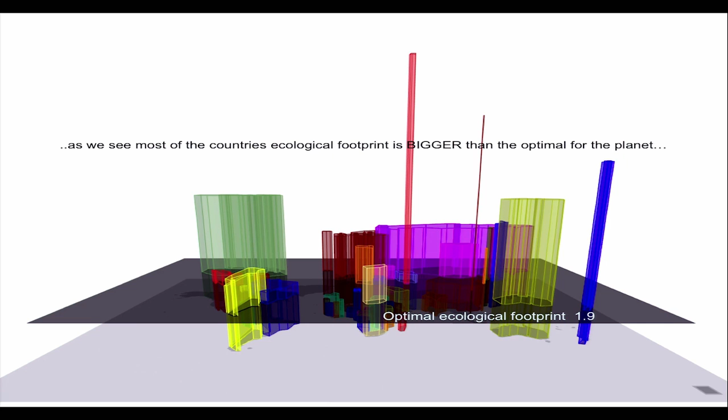That method somehow has become what's there at the moment, measuring through BREEAM, LEED, other kinds of vehicles. Somehow we can measure our activities in that way better. Not that they are good, or not that they are profound, and it needs still development.

So it was advocating, and I think you were also discussing that. What can architecture do in that way? It is almost like a device, a vehicle to measure that and to show not only the state of the art, but hopefully also to measure something like a pre-evaluation of what the future can be.

Because buildings are super slow. Seven years, ten years we need to build them from the beginning of the project. So how much can I make in my life? Six buildings, one could say. But you need already to think about what that building could do and anticipate on that.

So I give you some elements that we did at that moment to notate architecture as a kind of active element. We gave them verbs, like the spanners. They span, and they use at that moment their way of their structure, and sometimes structure can do that.

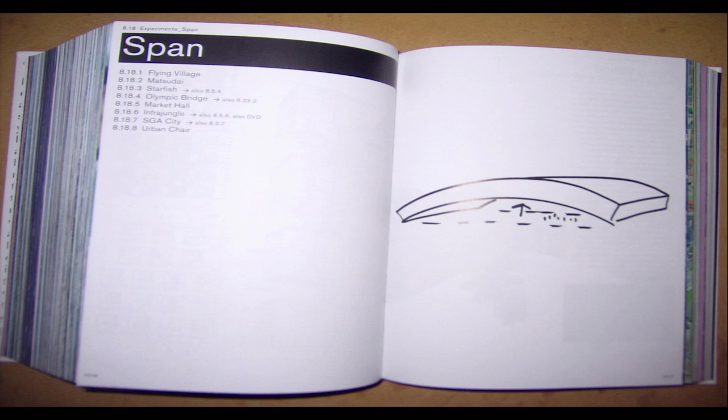Some of your colleagues, who unfortunately died recently, has been exploring so much in the case, I think, in Venice at the moment. So what's next when we notated that?

And I bring you to Rotterdam, because we made this kind of thing, that's 10 years ago, that exactly measures it. And we showed how that could happen. And I'm happy to show what happened last week in that way, because it's a kind of emotional moment for some reasons that I will explain.

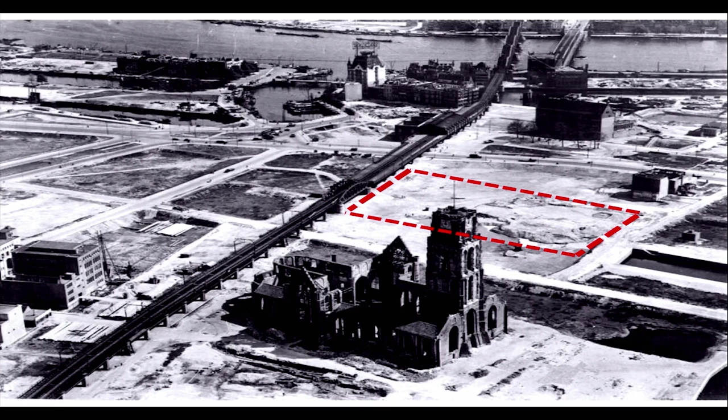So this is Rotterdam, and it used to be like that, and then on that red dot where the dam in the Rotte River has been made, at a certain moment some people threw some stuff on it and flattened out that city. Rotterdam didn't make a decision to restore itself, no. It tried to invent and reinvent itself actually continuously. And that's why I love that city.

I mean, there are buildings from the 50s, rough guys that somehow wanted to compete with Ponti, but didn't, of course, they were not that good. But on the other hand, Maaskant is my favorite Dutch architect in that way. And then afterwards, there came this kind of nostalgia of the 70s. Humanism came everywhere, and we made tree houses where people could live in trees again more. And it ended up in the urban renewal with silly buildings, etc.

So Rotterdam is indeed a kind of incredible mishmash. And maybe therefore even more contemporary than the American cities in a way, because it continues with this reinvention, where the Americans sometimes seem to stop in its own eternity.

So on this place, on the greatest plaza, the biggest, sorry, in Rotterdam, a plaza 1.6 kilometers long and 100 meters wide, so you can really land with a plane in our city. At that moment, we tried to make a kind of scale jump and to say, can we build buildings on that spot to make that plaza somehow in a kind of relationship with Siena, as we said, and how to do that.

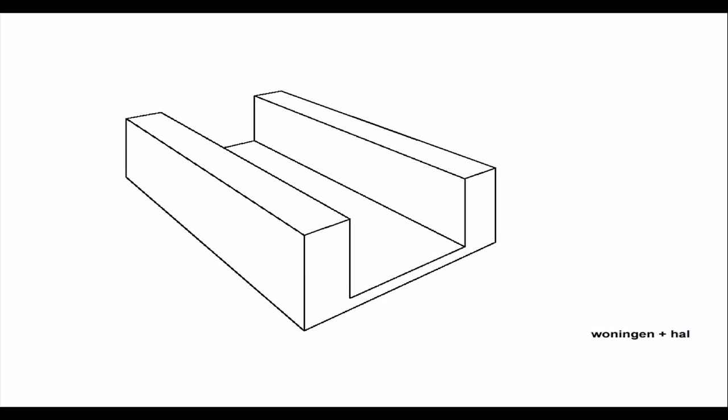So the client asked us to make a housing and the market hall, something like Miralles, you know, cute and with some colors, and that's it. And we said, this is the moment to advertise food production, good food in that way, especially in the Netherlands, which has not a very good tradition in the cuisine.

So it could need at that moment some kind of update. So we said, why don't you just turn it up and twist it? Because then you have a good hall and you have more penthouses, so that compensates this act. He said, okay, but they have no view. So we said, okay, let's then make this view. And they said, yes, nice, but it's too expensive, the structure, too much steel. Can we avoid steel? And then, okay, you use a Roman technique basically to do that. And then he said, maybe, but the lift doesn't fit. So it ended up with this shape.

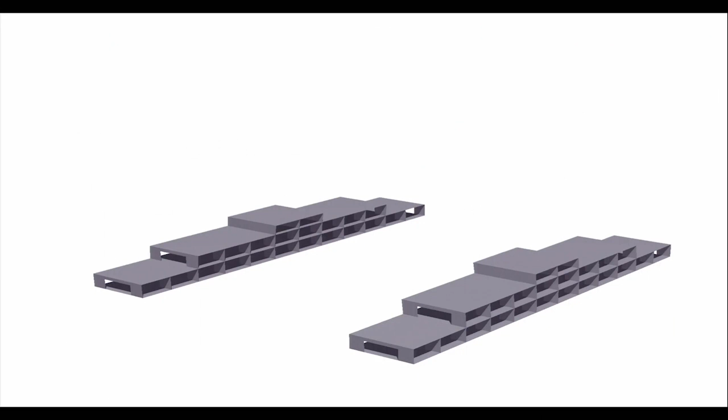And then we started with Dutch technology. Dutch technology with social and lower middle class housing is that you make a tunnel out of steel, throw concrete on it, you pull the tunnel out, because it's a complete house, and put it on top.

That made it possible that we could push this tunnel sometimes 1 meter, 2 meter, 3 meter, until they kiss the other side, and that hug at that moment turns into this kind of thing. You have a nice reference here close by, and we use that reference, but a glass roof is easy to do.

So can't we make really a good galleria that somehow is inhabited? At the moment in your galleria you can't live. There's only one mini hotel, the highest expensive with butlers, and so it misses that kind of urban life as such.

But you can do it. That's a nice thing, because in our houses we need 25 centimeters of concrete because of acoustical reasons - I don't want to hear you, is what it basically is. But for structural reasons I only need 14, 15 centimeters, so 10 centimeters only for that reason. Here you can use that 10 centimeters to do this.

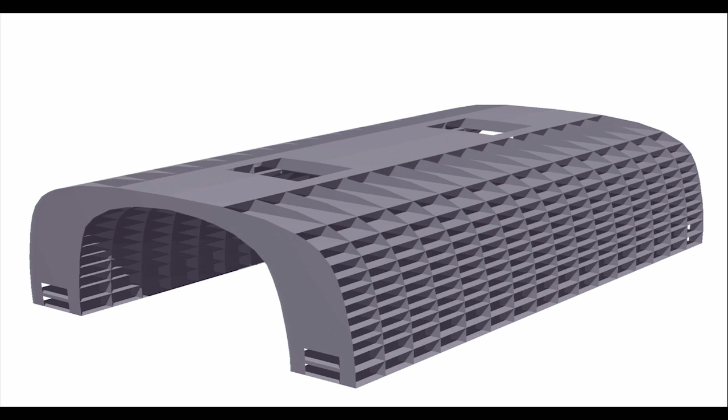So what happens with this housing? You have gratuitously, for free, a public space. Well, for free - here is how it is.

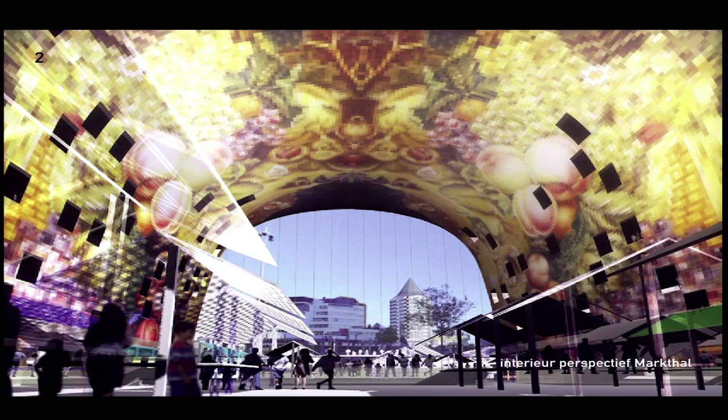We clad the whole building with the tiles of the city so that it becomes more Rotterdam, and in the end we concentrate on this space, which is like a celebration of that - hopefully about traders and about food - and we needed a kind of screen to show where the food would be.

We used it in the beginning with Philips to make an LED screen where you can say the food there is 100 euros or 5 euros there, or your son is lost and let him come, or you show pictures of the food, how it's growing.

And the beauty, of course, is when you put people behind it. Then you can open up the screen, like in a very good James Dean film, where he lives behind the Coca-Cola advertisement, and you can look down and say to your son, hey, come on guy, bring the fish up, we need to cook.

So it wants to be definitely pop, and it wants to use architecture to make a monumentalism not only out of museums, theaters, villas or expensive office buildings, but to use also housing and market halls in the slipstream for that.

And then other architects come in - I mean, we don't care, this is urbanism. So then you make a mini city out of that. So this is the process.

What happened in these 10 years? We had to clean up the site, make another building there, put a school there, make a pond to make almost an iceberg building, and then the building comes up, and we started to construct this with this tunnel technique, this arch.

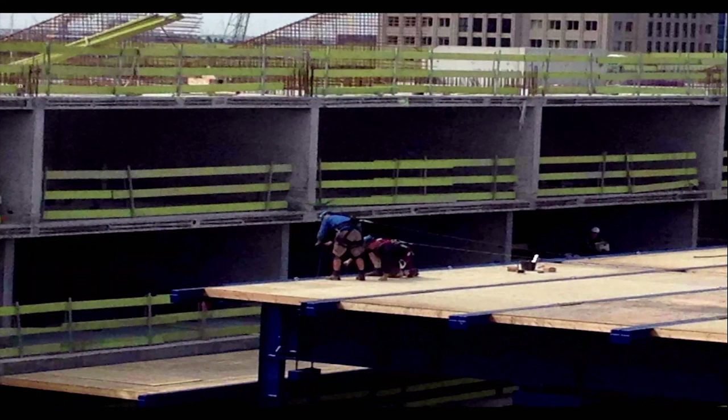In the meantime, the screen was too expensive by Philips - you know how Philips is - and Samsung also didn't catch up. So we transformed it into a picture with a 3 GB image.

Where we show, basically like Alice in Wonderland, lying in the grass, what happens on top, and there are glimpses of the future city into it.

Nice detail, because we made Big City - you were referring to that in a way - that was forbidden to put it in because certain people in Rotterdam could be offended by it. Amazing, not like a tolerant country, that erased the Big City out of this picture.

So it has been printed and burned into that, and then of course it turns into an environment where you live behind the flower, live behind the raspberry, and are part of that. Even the cleaning machine becomes like a theatrical piece where operas could be played now and be shown.

The living in that screen, of course, is a device to avoid that this public space can ever be privatized, because people buying their apartments control that space basically, and turn it into an almost impossible situation with these windows as such.

Of course, the windows have different relationships with the house. Here, this is the toilet, and from there you can sit and look at the market hall.

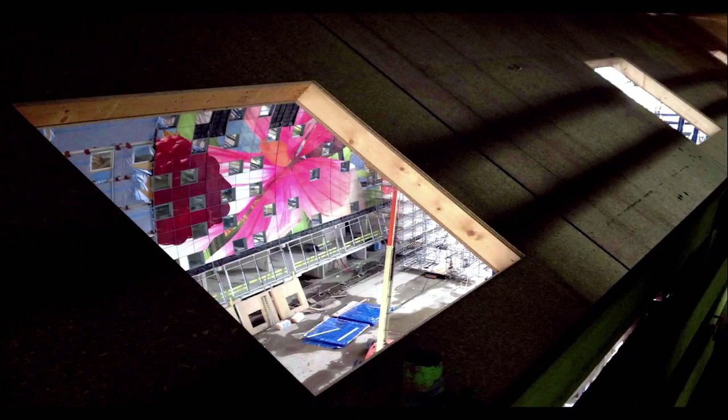And this is my favorite bedroom, where the glass is a kind of pillow, so that you can wake up with a very beautiful dream or a nightmare, but that's for further discussion.

We go further in the hall, this during construction, and you see more windows of that. And this is my favorite place where my kids could play with Lego at that moment, looking down 40 meters.

So somehow, what is edginess in that way? Can that be done in a domestic world? It's a discussion you have been facing also with your vertical gardens in a very beautiful manner, and it's there at that moment. These windows are on different places, even under and next to stairs, and turn it into a kind of collective device where we observe the market.

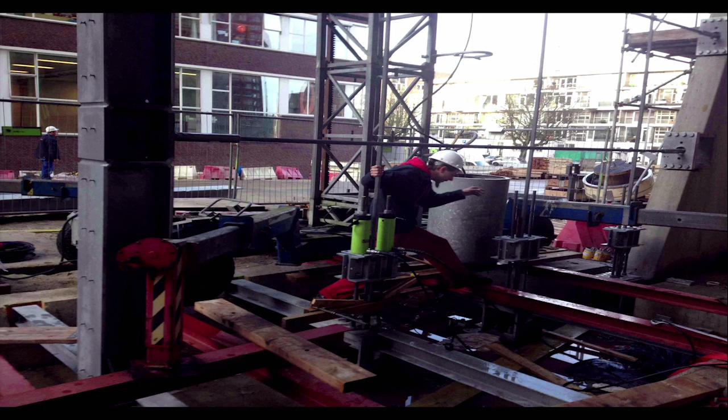And of course, in the end, we had to close it because of different hygiene rules, new European rules, when you want to have open markets for fish and meat. We made the thinnest wires, like a tennis racket basically, where they can go up and down in the wind, and even that cost us almost three months to span it. But we can cut them away if this market is not a success, and then it's there.

And then it becomes a kind of messenger in that way, in its most simple manner. It's like the most horizontal bended skyscraper in the Netherlands that you can see from different spots. At that moment, it started to become during construction already a kind of plaza, where this advertisement of space, housing, and painting in this case turns it into, hopefully now, a market.

So here are the days before the opening and how it became great. This is a nice bedroom. How it becomes part of it.

People started to talk about it, and that's a kind of surprising talk about what a messenger can do. Come to Rotterdam. People went there to discuss it, thinking this building would bring in more tourists to Rotterdam. Yeah, we need them in Rotterdam. You hate them sometimes, I understood. But it would be like 50,000 extra. So the rough guide was already explaining that due to this building and two others by colleagues, people should go there.

That's funny. If that happens with your buildings, then suddenly, wow, that's touching in that way, and one cannot expect that. So we were quite happy that our queen came to open it last week, and then immediately you enter. The word 'pop' now definitely is part of it.

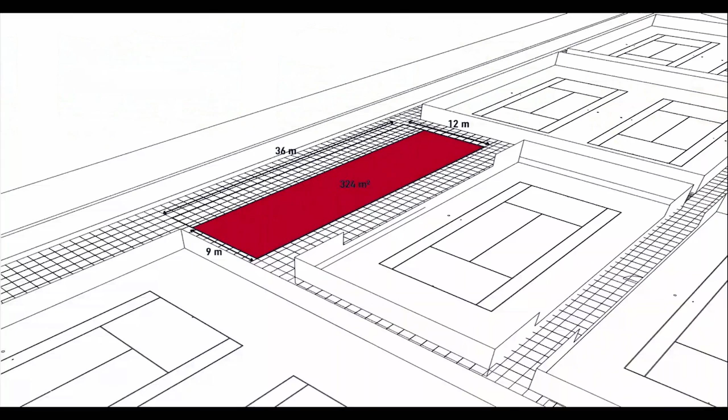So what to do then? How to make buildings around the center court and the other courts. This is the first step to do. And we make here a restaurant, canteen, clubhouse as such that has a good view.

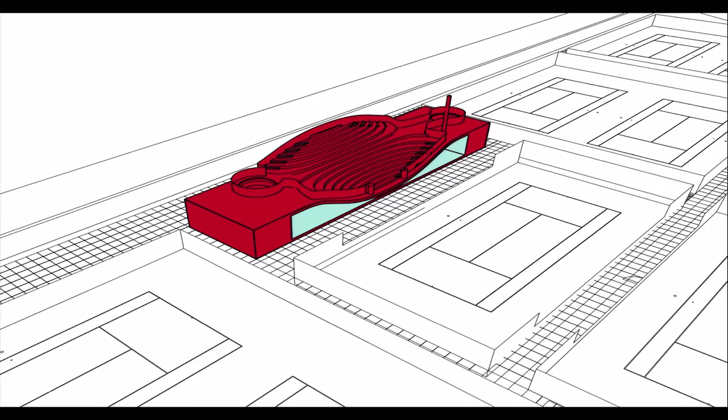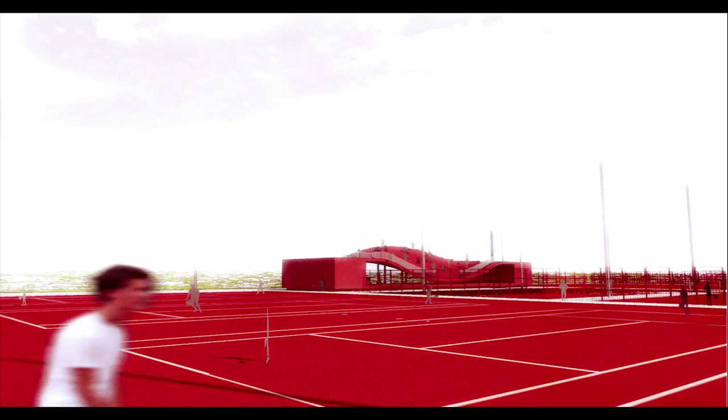And then started to use that span of this. To span here not only a tribune, but to manipulate that roof in such a way that it gets a double position. So it becomes the nicest couch of the Netherlands, where indeed we can say look at each other and look at all the fields, and somehow have this feeling that you can have a relaxed, soft environment. So here it's under construction at the moment, and we gradually turn it into this kind of soft device that somehow wants to celebrate the Dutch tennis championships in say 6 months from now.

So that's the nextness. Even a small project can double its space. Even a tribune can become nicer and turn into such a kind of public event.

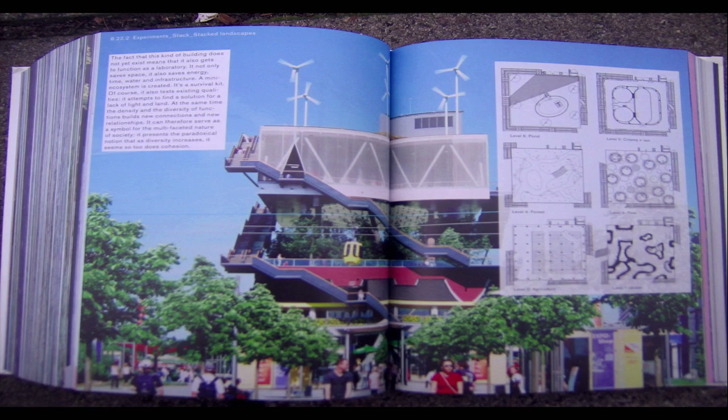I continue with that, and in this case I go to the mixers. In those days we made this mixer. We stacked landscapes in order to give a better perspective on the capacity, and built that thing, and made, I think, one of the nicest spaces in our career still, that a forest can be a building, or that a building can be a forest as such. That has been acknowledged in those days quite a lot.

But what's next, and that's why I show it, because 10 years later, this is one of the monuments of Germany, but due to the crisis in Hanover, the whole area is emptied out. It looks like Nagasaki basically. This is the state of the art of what was a utopia and became dystopia.

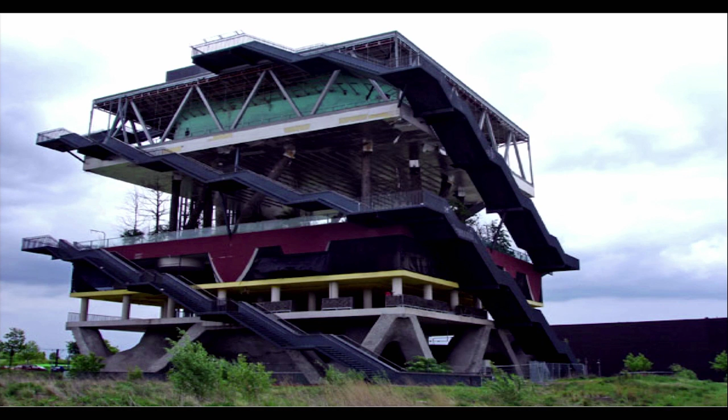But maybe on the other hand, it has a kind of beauty, like any German loves ruins. Goethe is only about ruinism. So this romanticism is kind of celebrated even in this way, with many birds, many hippies that squat this building at the moment. So what's next after that, the enterprise?

You know some of the projects where we stacked some program to make, in this case, a collective public floating soccer field. That turned into a kind of operation that commented on Madrid, where the mayor at that moment said, in his what-nextness, you give me now not only a tower, but also a block.

So next door, we made this opening act of houses stacked on top of each other, where each of them has gardens in a collective way, and where you could look out anyways from this patio, this horror of the kind of block enterprise of Southern Europe as such. That makes then this kind of, even from a toilet, these perspectives thinkable in that enterprise.

The nice thing is this looks like someone had done it before. Maybe it's not only Ponti that we have to celebrate, but also Le Corbusier, when he made a proposal for such a building that has not been built. So somehow, in social housing, we worked on it and tried to give him, in the end, a position. I'll come back to that later.

So what's next in that way? This is nice, of course, from this week or last week, when the new president in Jakarta - we love him, clearly. It's horrible to see how these anti-democratic movements are going on. But in that position, this project is taking shape, I'm happy to announce.

I show this also to address a love-hate affair with Milano, which on one hand makes beautiful towers like Stefano's one, and on the other hand makes extrusions of stupidity on the current former Expo site.

So there's what to do in this case when in Jakarta, the flattest city of the planet, it's a giant village.

Kampungs are there in a very beautiful, sensitive manner, partly being replaced by emerging high-rises because of the new metro system. So I take you to that spot, the former Peruri money factory, where a new metro station is coming. If you look to the surrounding, this whole area is surrounded by villages, by mini blocks, by an urban village-like fabric. So we suggest to construct a tower here with Jerde, to make a tower that is composed of its environment and turns it into an object.

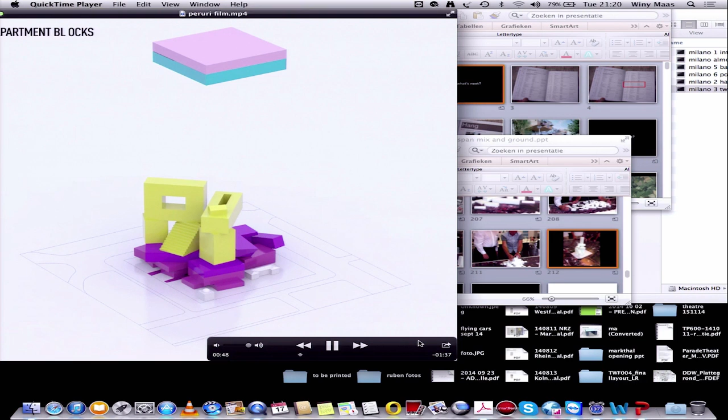An emerging skyline and a lot of kampong. The site needs some pavement, needs a connection with the metro, needs to keep some monuments and add a mosque. We dig it, put the parking in, make a basement for the shopping center. Split the shops, split the retail on top and the restaurants, split the entertainment zone by MGM. Split the houses, split the offices, and top it up with a hotel.

Clad it, and cover it with forests. Because with that, we can make a kind of ventilation and avoid these open or closed malls. And then it fits somehow in that way. It comes up.

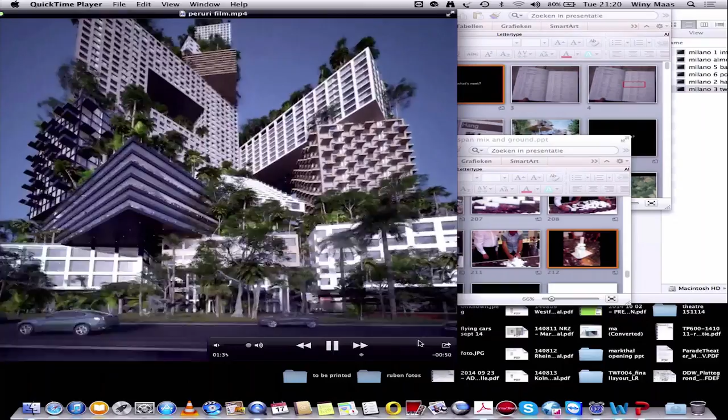He wants to connect different neighborhoods. Here the cinemas, there the big cinema in that way. So let's go in. Because the issue, of course, is that somehow even the biggest monsters deserve identity and individualism. So you come in, and then you can look up and say, hey, that's my house, my neighborhood.

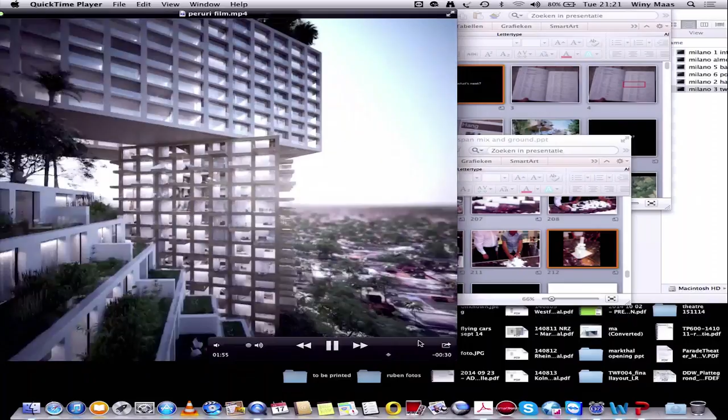So that's what's next, after stacking and after... so what comes afterwards? Now I take you to a more fundamental chapter. Because somehow, what I wanted to say with that is, what is an architect doing now? Does he keep to himself? Do I not surprise you in the future anymore? Do I go on with my agenda? Or how does it become larger?

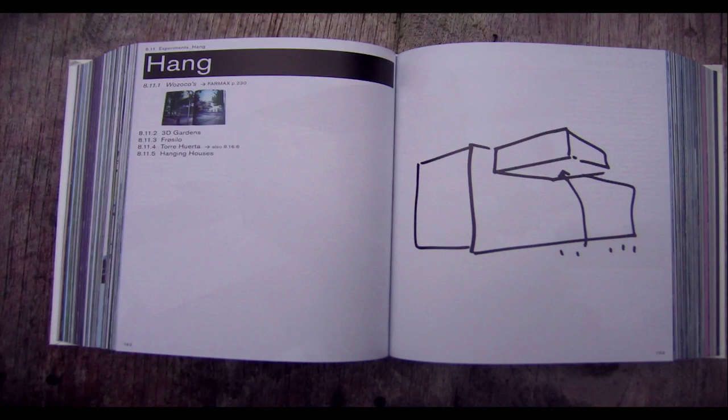Some things you have to fulfill, and I need more time to prove certain kinds of this hypothesis that we share with each other. So I give you one example before introducing and bringing you to the wider subject as such. We were a bit known for our hangers, and we hang elements to give more space actually on the ground. That's a while ago, so what happened afterwards is what I would say.

You know maybe in Suffolk, with this kind of super cute landscape, we were asked by Alain de Botton to make one of his holiday homes. So these were the houses that were there. And the second week that I came back, they were away. I said, what is this? You make one of the most pure farm-like houses that you can do, and you get rid of them.

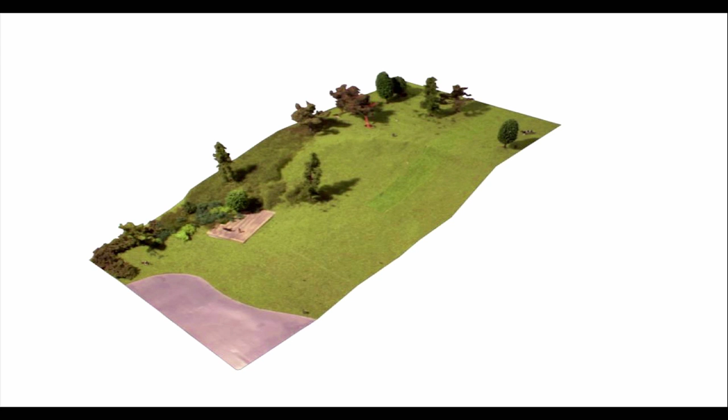Yeah, I want to have something new. Okay, but what do you want then, something new? Well, give me a barn. I said, man, are you crazy? Do we have to fly in from the Netherlands, drive two or three hours over the stupid roundabouts in the UK, and then end up in this cute landscape? Yeah, no, but Prince Charles wants to have it, because Prince Charles is the protector of this national park. I said, yeah, but is this...

The good thing is that Alain wanted to have a house which was too big, and the footprint didn't allow for it. So what we could do, we had to push it, and at a certain moment it would fit the requirements of the national park. Now suddenly all the pigs and all the pheasants and all the rabbits can pass by, and it becomes like a beautiful object. And he said, yeah, but I can't do that, that's too expensive. So I said, okay.

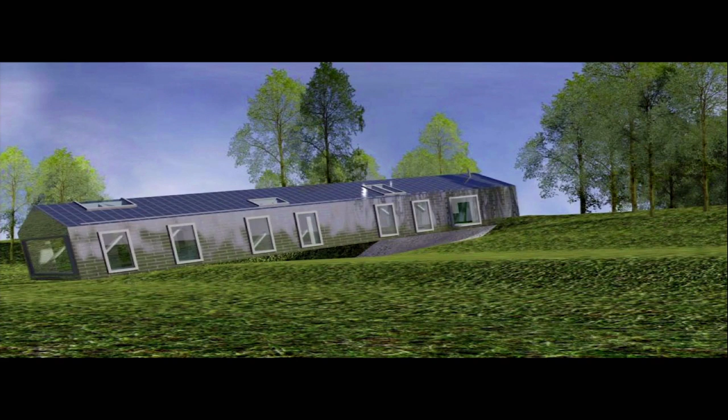Then I dropped the thing. And yeah, but this I can't advertise for my company, the dropped barn. Well, there were more bombardments: why can't you do that? And in the end, he said, okay, let's do it. So that's how it happened. So here you see the barn coming. Look, there it goes, blop, and there it goes back. And it makes this kind of space, say the best veranda of the UK.

And then the barn evolves itself, and it turns into a space where you indeed have carpets, like we do at the moment in the market hall. But then you can play with the carpets if you are in vertigo. You can see your son, and you go around it in that way to the house, and ultimately come into this kind of space. And then the balancing barn is there, with a space that is like the best veranda where rabbits can pass and where you can observe it in itself.

So again, with 120 square meters, you can make a device that advocates not only a leisure building, because it's a bit uncomfortable in that way, and wants to avoid that you fall too much asleep. And that was a philosophical answer, of course, to Architecture of Happiness of Alain, in that way, to have him somehow into that discussion.

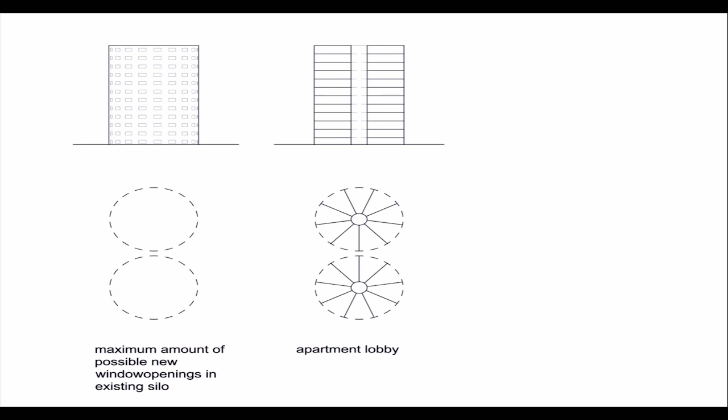So we said to the client, let's not make those houses, but let's hang them on the outside, so that you have a good lobby and a good view in that way. And so here you see them happening, how they turned into houses where indeed you can observe the city, and that even, say, IKEA furniture doesn't matter anymore. And you gave gratuitously like a Guggenheim museum to the owners in its very heart.

So what's next after this hangar in that way? And I take you to the next example. That's this, from 4 months ago. And I get this on my mobile, and what is someone doing? So we went there, and you see this emerging in Copenhagen, just 2 kilometers away from that. What do you do at that moment?

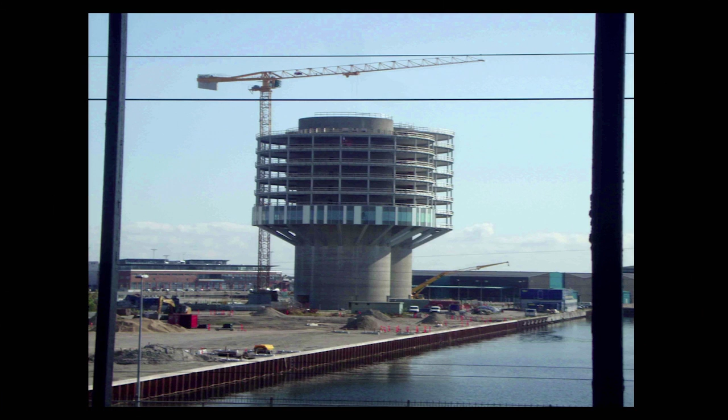You call your lawyer, yeah, Claire. Send a letter to the client, same client. And what is happening here? And look to the old contract that you have and discuss it.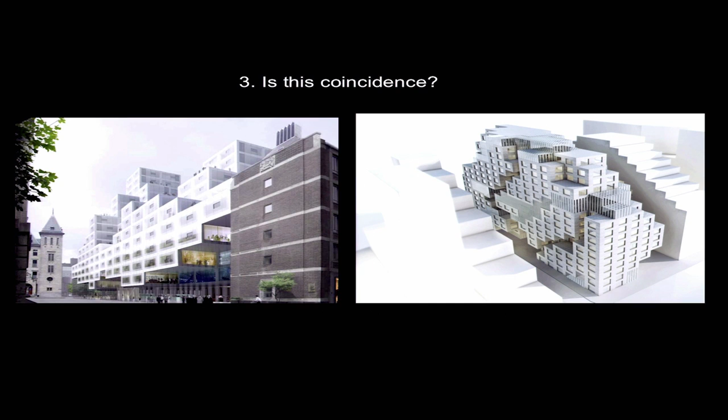And that, say, our building in Oslo, a colleague in Rotterdam, that we are family, one could say. Or this is a building that we make in Paris, and we look to our colleagues in Singapore. Or still, we made this in Milano, I have to show it today. And this was a design for one of the towers in Milano. You can see now what construction is going on, where this dream was happening, and another colleague makes this in Bangkok at that moment.

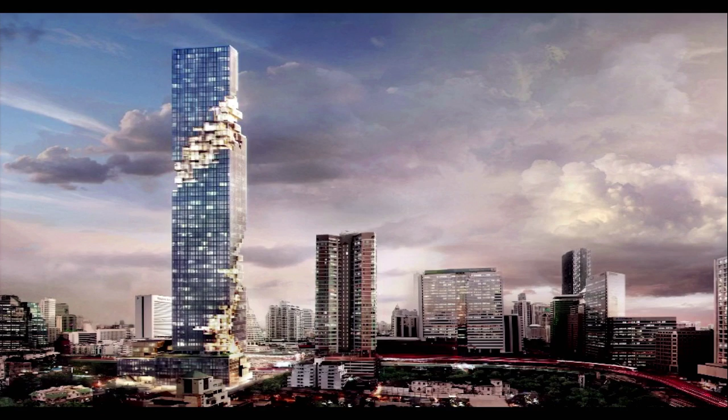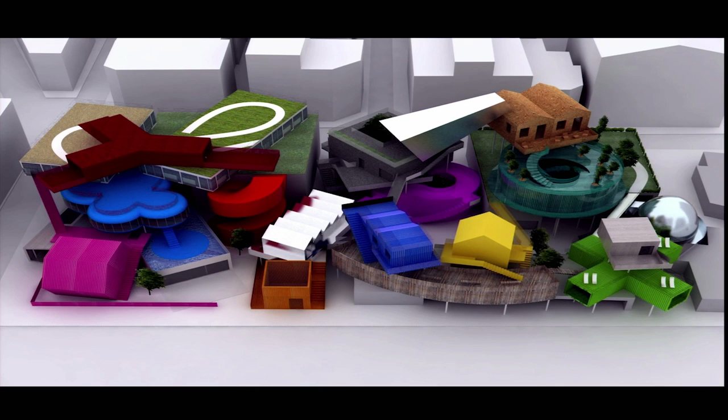Or a gorgeous building in Basel by Herzog & de Meuron, and our project for the vertical village in Taipei. I think this is an interesting case, because the first one, Herzog & de Meuron's, is a single house, while this one is urbanism as such. I'm happy that Expo made that possible, so that we can make the next step.

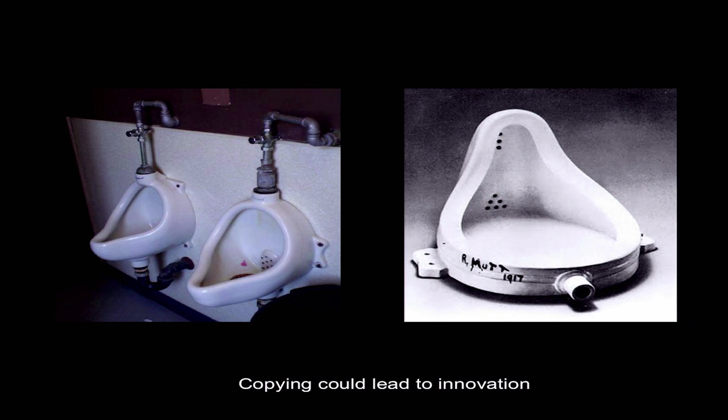So what's next? Why can't we work with that? Because in natural science, people refer endlessly to existing elements, while we are too obsessed with authenticity. There were times where originality, especially in Istanbul, was not happening. There are new kinds of ways of dealing with that, and more incredible approaches. This is a picture I dedicate to you, where others are very clever in thinking about this relationship. These are current examples.

This is the new Aboriginal Museum in Australia, which is intriguing. So what's next? We did an exercise in Architecture d'Aujourd'hui to talk about déjà vu in that way.

That's the question. There's already the pixel movement, which started in the 60s. I think it's interesting to see - I love Montreal at that moment, but there was a lot of symmetry in the buildings there. Currently, we can work with asymmetry, we can work with more intelligence on that.

I always compare this process - copy-paste is a working title - to track changes. You start with a text, and in this case it was for Sarkozy, then the president said no. I still love to show why he or she said no, and to analyze this improvement. So, track changes architecture - maybe we can work with that in the near future.

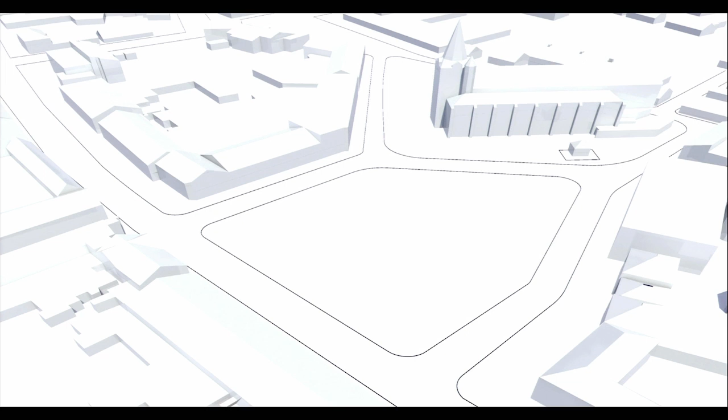So we were asked, what do you want to build there? And this is the old plan - this is the bombardment, you see here the old street, the bombardment, and of course modern times bring bigger plazas. But we're talking about a village - come on, we're not talking about a big place. So this was the initial layout before the bombardment, then the Renovation Act. So what do you want to build, he asked me. Well, I looked to Milano, and I said I would like to make a tower.

Because then Schijndel can say hello, and you can look to Brussels, you can look to Amsterdam, and immediately the whole Calimero complex is forgotten in that way.

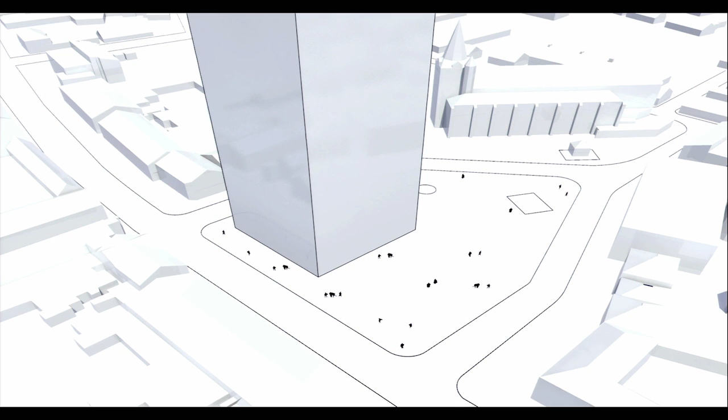So he started, yeah, good idea, and started to talk about it, and gave it to the alderman. We have a system in the Netherlands where when a mayor says yes, he gives it to the alderman, and then half a year later, a poor alderman - it became politically impossible to keep this project going, and he had to go. So that's the drama of architecture. So then we started to discuss - okay, the mayor said, okay, last chance, you have to work now with all the politicians, all the political parties.

And the Netherlands, so Schijndel has 17 political parties. So we went, you have 6 weeks to make a solution that's politically covered. So how to do that?

Every Thursday evening, you drive to Schijndel in darkness in the evening. It was in the middle of the winter, with snow, etc. And with one light still going on, that's where we met with all these political parties.

And you start to discuss. So what do you want? Should it be this? No. This? No. Yeah, that's okay. And the width, should it be this? No, this. And it's too thin, they can't earn money with it. Yeah, that's okay. And the height then, well, the same as the neighbor. And the roof, yeah, well. So, what to do.

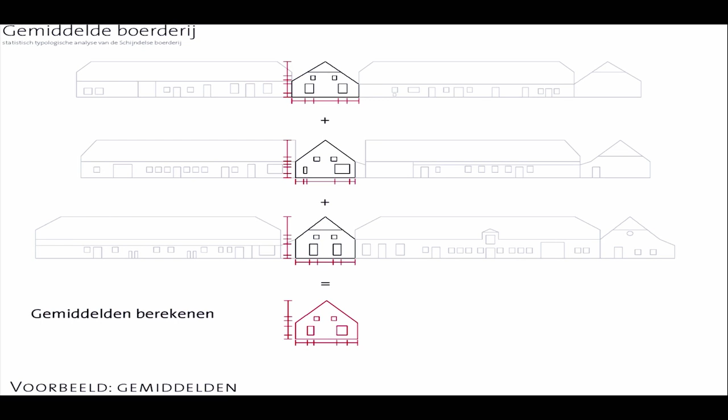This is so beautiful, because if you look to the rest of Schijndel, and you look at all the buildings that are there, we start to analyze them and say what do they share. We went through all the buildings that are there, 500, and this is an example. We photographed them and said, well, this is how it is. This pixelization, we make the measurements, and then compare it with everybody, and then you can calculate the average in that way. So we continue with that, with all its means, and at a certain moment we found out that this is the average farm.

And that's interesting, this drawing, because on one hand they want to do something that they know, and it's very Freudian I would say, and on the other hand they want to enlarge it a little bit, one could say, because this is their desire. So they grow a little bit in time, I could say. So we said, why don't we do that literally then? And then you make doors with handles like here, and you get your farm, is what it is.

Yeah, is that not too ironic, Mr. Maas? But no, maybe it's good. A certain irony that helps, and I appreciate that they went for the self-irony in that way. Because I think self-criticism and self-relativation is now a virtue, especially here in Italy sometimes, where everything is so serious, this could be maybe a message to that.

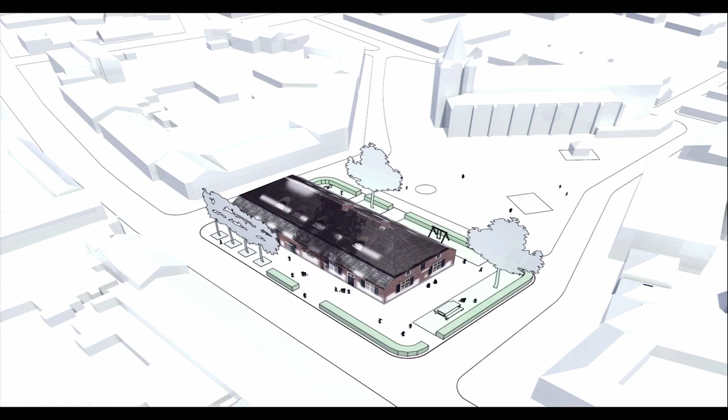So, okay, but now in classical materials, what is that then? Yeah, now it's straw, tiles, bricks, wood, and glass. Yeah, glass also, that's it. So we made this is the farm, and it's completely in glass, and how we made it, and then it's there. So it is completely printed in the glass, burned in, the average farm.

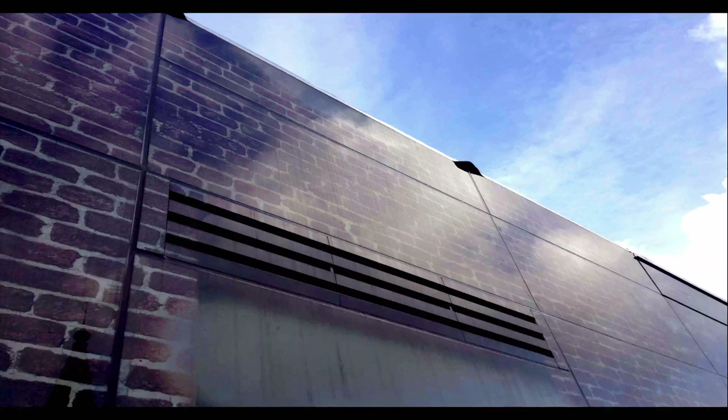It becomes like an object, and then of course the detail is very carefully made. Ventilation in a picture is like that, and you start to reflect the situation. Right? It's a kind of piece of memory. It cost us, in terms of printing and making the renders, almost 5 months to do that, because you have terabytes to control. You have to render farms in Auckland, in Toronto, and in Buenos Aires to get this done on time.

So suddenly you think, I'm making the thinnest building, the thinnest piece of architecture on the planet, with 2 millimeters. And on the other hand, it takes much more effort than to make such a ceiling. So there is, so you see the numbers.

Of course, the interior is what counts, because suddenly it becomes like a place where you're surrounded by the farm, and you somehow cook in the farm or wash your hands next to the farm, and that kind of juxtaposition. But even interior architecture by different architects, I don't mind, because in a way this kind of farm saves it all and makes it into this kind of environment.

This is the human scale, what you were talking about. And somehow it becomes kind of poetic as such in a way. Or even the shops, they deal with it and work with it. I mean, these puppets easily deal with this kind of composition. Messages come through, all the neon is orchestrated like that. And this is then the thinnest detail, to make windows that do that work in that way.

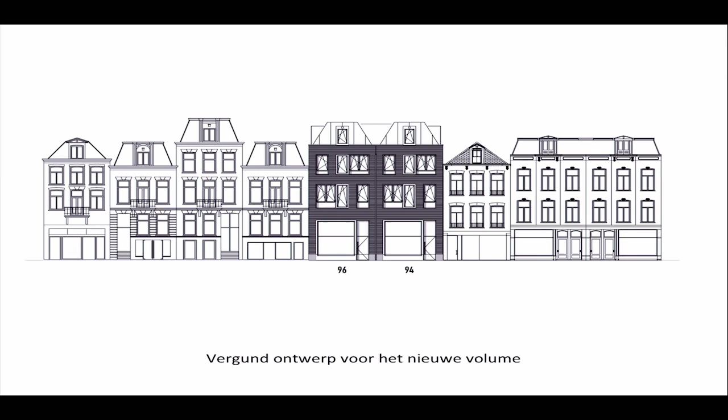So we look to the old drawings, because it's a highly protected area, and these are the old drawings as they were. We draw them in a way what happened - the former architect dealt with the municipality of Amsterdam on this kind of architecture and this kind of enlargement. Oh my God, that's the problem. And you might say, in Venice anyway, they talk too much about reinterpretation, and somehow they get lost in it.

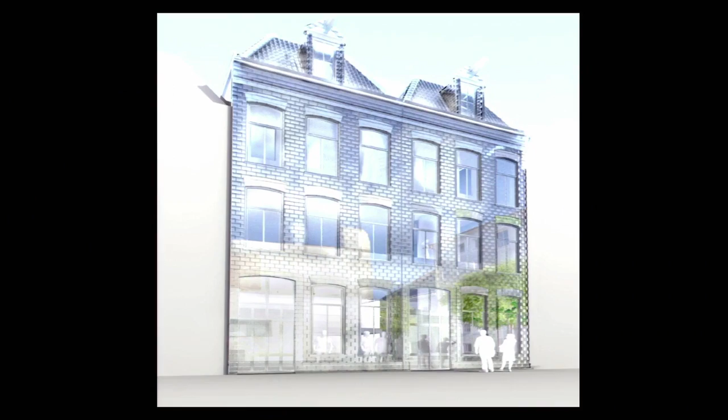So we said, okay, we go back to that, we stretch it in that way, and we make a kind of envelope that we turn completely into glass. Every piece, every block, every wooden panel, every tile, every gutter is glass. And then suddenly you get a kind of ghost building that shows itself in that street, and becomes somehow poetic because of this.

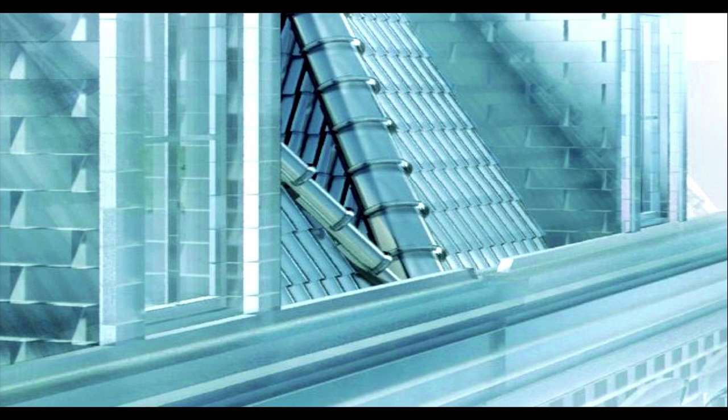They're made in Italy, everything in Venice. They were produced, and now thousands of blocks and elements are shipped there. It took us more than 3 years to work with this family in Venice to make that possible, and to imagine an interior that maybe looks like that in the end.

So what we try to do at the moment is discuss with the client to continue with that. That means in the end the glass furniture could be there, the glass toilets could be there. Also the neighbor, I want to look through him, so that gives a kind of perspective. And how to deal then with intimacy is the question.

So by dressing up in mirrors, like a good James Bond movie, suddenly it becomes possible that it takes away from your breasts or your intimate parts. So here you see images of that element of intimacy that we are imagining, and here the perspective to the neighboring area as such.

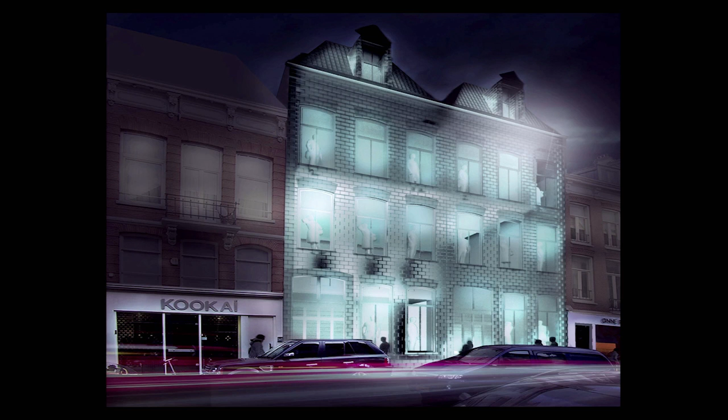So we had to calculate the amount of bricks in the area, and you see how many bricks we are confronted with. In this case, when we translate it into complete bricks, we don't do it - complete glass is impossible. So we negotiated somehow the balance between the two, and let's say glass is turning into ceramics at that moment. That's the hardest part of the operation, because the glue is not the same. So that is now happening at that moment - you see how it will work into the shop.

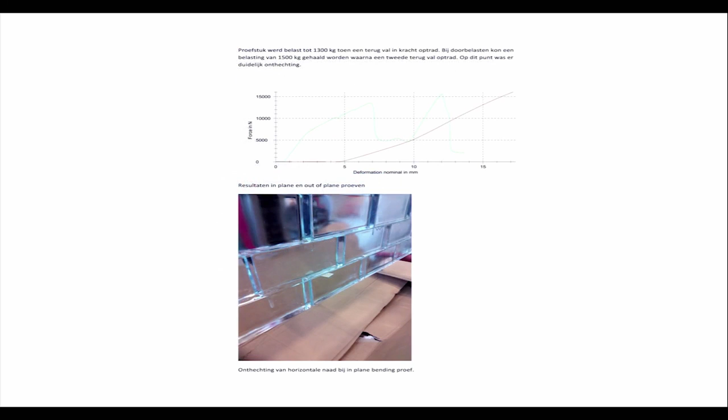Here the tests, how the different glues are happening, how we do with emulsions, how we had to do endless tests in order to avoid bugs coming in that way. And so in the end we have this product that somehow can manage that powers on itself.

So that's what's next. You can continue in this adventure. And what's next? I'm happy to show that soon this badass copy guide will come on the market. And of course we start with the biggest disclaimer ever made on the planet, because how to do that in that way?

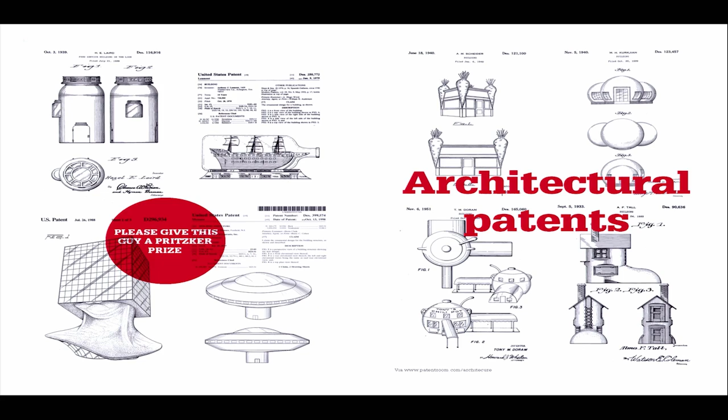There are many articles, people that we interviewed on this aspect of copying in architecture, where different examples can be made. We need to talk about law and ethics, and about the patents issue that some of our ancestors faced. We have to talk about strategies, how to deal with that, and about speed, because that's one of the most important elements in this matter.

And ultimately, there's an evolutionary concept to be imagined in this library that we engage. We can learn from China in this case. And then we can imagine new El Croquis. So with El Croquis, we make this series of possible El Croquettes, as we call them. This is the format that we have given to the students to work on.

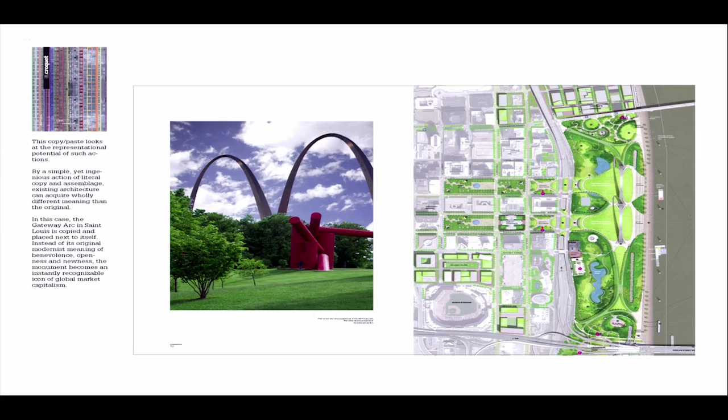Who is now improving Sejima in that way, improving, say, this original in their subjects, making products for SANAA at that moment, doing great with Philippe Dujardin possibilities, discussing with Herzog and de Meuron about export, and of course our favorite project, that Saarinen in the end will be doubled. That would have been the best answer in that competition. And then of course SimCity is about that, so let's go and deepen that even more.

The rest I will not tell you, because you will see that in the next episode. So to end in that way, I take you of course to the most theoretical example after this, and that's closing the book of KM3. So what's indeed next? That's writing KM4 about time.

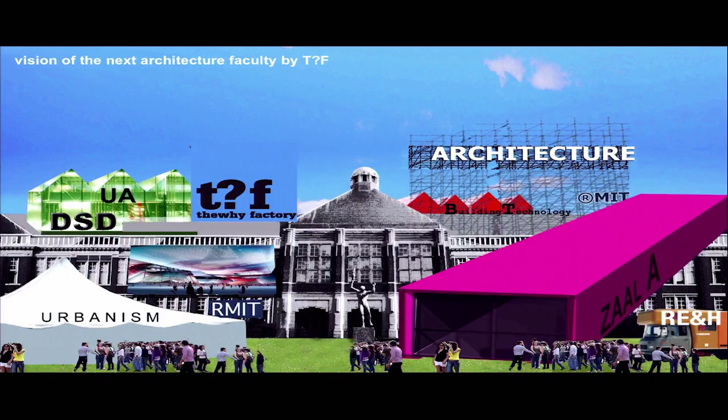And that is based also on a next step that we try to do in the Why Factory. You remember that building, and that the dean went out, and this was his place, and we cleaned that part and made a carpet, invited people also from you. Three weeks later, there was this happening on the horizon. I went close, and that is my carpet, that is my department, and this is the inaugural speech at that moment.

Students in our office, in tents, making this building together with many professors. And here you see that happening - pump up that roof in that way, and then start this arrangement to make a good talking place, and put the professors underneath, and produce some of these kind of elements that I showed in the Biennale in Venice also. And then you invite, like, people to talk with it.

It is also a way, and then it comes to the subject. Because I do think that we have many universities, and all universities look a bit the same. And that's a pity. I think MIT should more concentrate on computer programs. And I have no clue, Stefano, what you want to do here, but in that way, is it urbanism that you want to show? Do it manifestly. Or is it about green technology? Do it in the end. I just concentrate on future cities. And that's because I think we don't need too many professors. It's better to have one professor and like 10 researchers that surround it than too many people that don't have any power.

So this is a production line where we do the visionary city. I'm not going into that, just this is what our calling is - again, visions are needed. That range, and that's possible in the times when we become too solitary, when we only look to the internet, and then this could be the architecture that can come out of it - we don't need any architecture anymore. The obsessive research on the miniature, wallpaper and the zine don't look big, they only look to this kind of sizes and forget the horrendous in that matter. So we have to use that small matter in order to make it, to talk about the large elements.

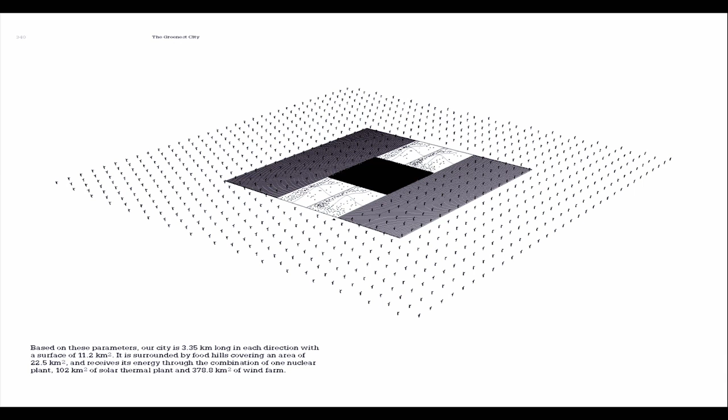So with a series of patents, we try to explore these dreams and existing patents, like this one, the crop rotator. And then, yes, you can make a green self-feeding city.

Or in this case, with a new kind of bacteria that are now in production, which glow when they have a certain kind of salt in the water. Amsterdam would be beautiful if you do that.

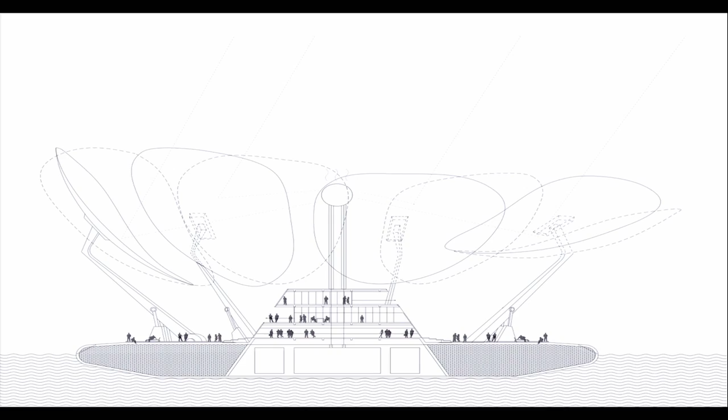Or this one, which is going to be built now in Hong Kong, where a patent by a German professor from Braunschweig is enlarged, developed on a larger scale, and turns into this kind of perspective. Wow, now Avatar is born again.

And the beauty that you architects can give to this operation is so good that we can accelerate Mr. Green enormously, so that in 10 years from now, I hope green is over, and we can then discuss architecture again. So that's what I'd like to propose as a what's-nextness.

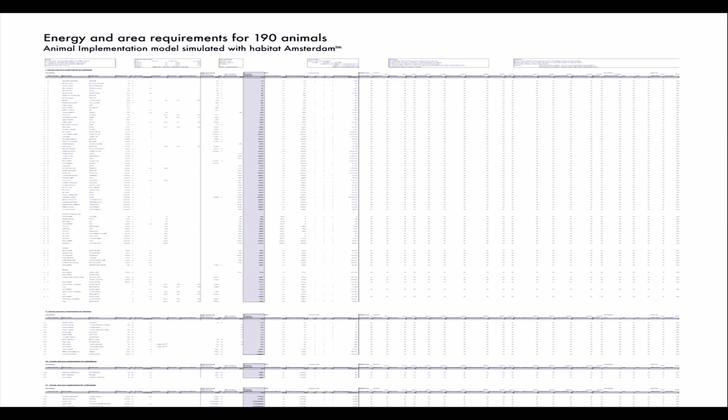So what can we do then? With the Design Academy, one of my favorite places in Eindhoven, we try to make products at the moment to imagine in that calculator.

So here, a new kind of railway for Amsterdam, where some guys are waiting on them, making this habitat thinkable.

Or this product, the softest brick in the planet, full of holes, absorbing sound—first snow is falling every day, one could say, because you don't hear anything. Used to clad these buildings, and as a side effect you get this kind of animals then in our city. So what's next afterward?

And I take you to the next example. Where is it?

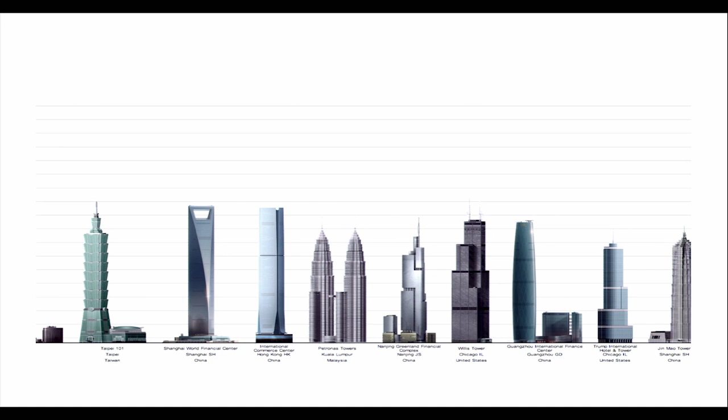This is an attack on these monsters, and these monsters are so stupid, because you come in, go there, that's it. And then there are architects that make this. It's incredible that you let yourself be used for that. I think it's only because of money that you do it.

So let's make a European operation with Lego. That's what we proposed, the opening act of the towers. If you do that in different ways, every student makes another hypothesis, and he made films out of this.

This is step by step. This tower opens itself like a pregnant woman to the world, and how much does that cost in a way? Or these splitters, that leads to how thin can they be made. Or these twisters that realize balconies in different kinds of formats. Or these balls that create neighborhoods in this tower. Or this cactus, also a good one to split it up.

This was started with OMA, but we made it now ten times better, because students are better in that way, newer. And so everyone can make a sequence based on his or her love, one could say, or his suggestion.

He got a low note, don't worry. This is an alphabetic guy. And then you have this kind of sequences and this kind of enterprises that we could study, where and how much everything costs.

And it has been into Venice, this one — this kind of army of towers that somehow showed this sequence of all these kinds of elements. And still I love them because they have a certain kind of poeticness. I mean, even Sol LeWitt becomes alive again.

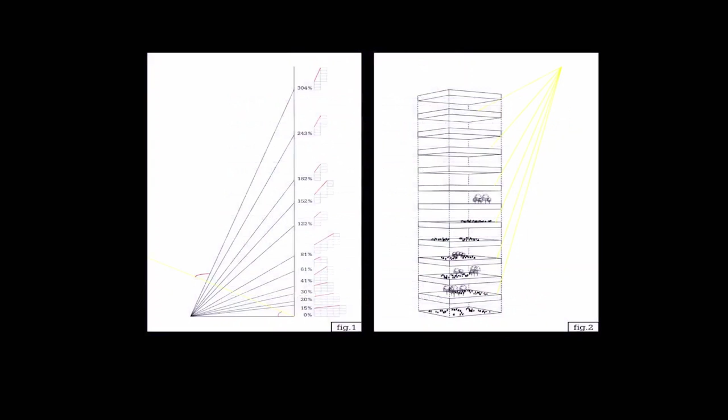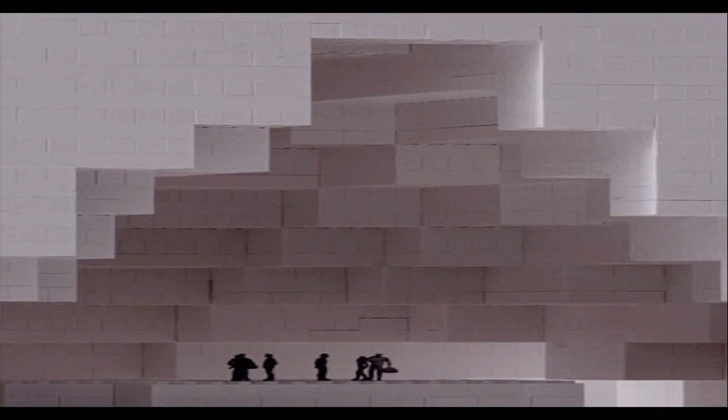And then they made landscapes also. This started with the Expo, and then connect them in different manners. And then, when you also have the parameters of structure in it, you get such a tower with the most beautiful grottos that sneak from one to the other, from the bottom to the top. That makes even a better logic than the Milano Tower as we had before.

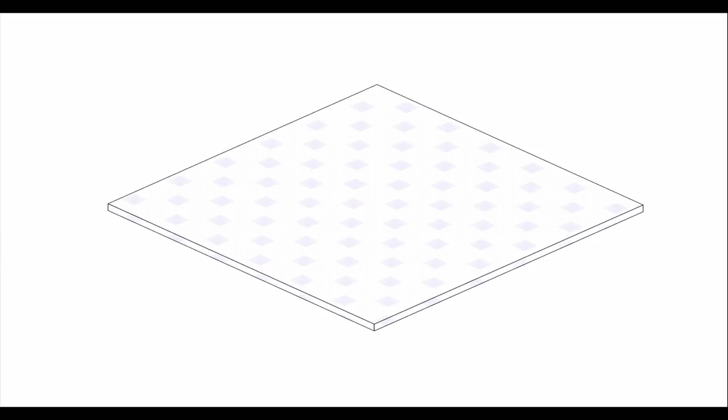So let's start with the same density as such. Let's give them good patios. And let's optimize the patios step by step to make them the perfect light and balconies. Or in this case, twist them and give another kind of patio life that becomes bubbly because of certain kinds of parameters that come in.

Or this splitting act, ultimately leading to slabs that with this manipulation become kissing slabs. Or this one, towers that split themselves and hug each other in order to enlarge the number of balconies. Or this one that becomes the thinnest towers and they touch each other for stability reasons. A gorgeous new Manhattan could this be.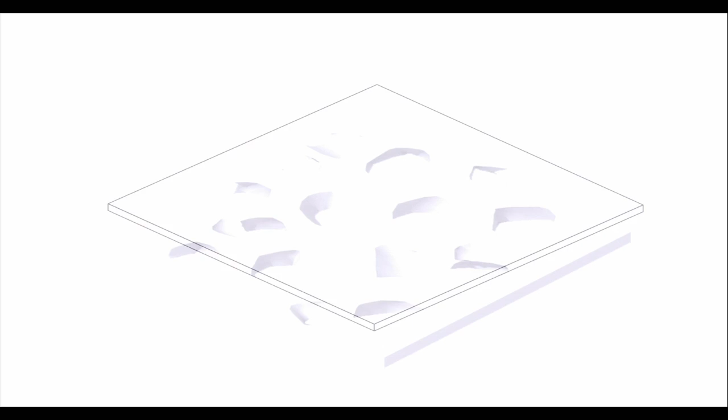Or if I go further and do a kind of hill-like topology that thins it and optimizes it out, I get almost like an atmospheric town with it. And in the end, of course, this pumping up the porosity to a level that New Babylon would be reimagined at that moment.

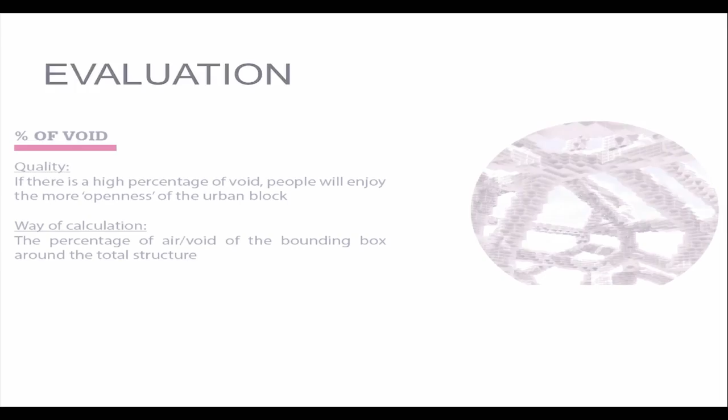Of course, we have to evaluate it on the numbers of voids, the numbers of terraces, the view distances, the increase of the area, the corner rooms, or how much sunlight will be hit on ground floor. And then you can say with that how much a normal courtyard and a new courtyard city could do. And you see how these different scorings are measured to this kind of performance.

And we can do that for everybody, so that suddenly we know what improvement is, and that's what nextness can be somehow measured as such. And that's what is then mapped in the end with this kind of connotation map to compare all this.

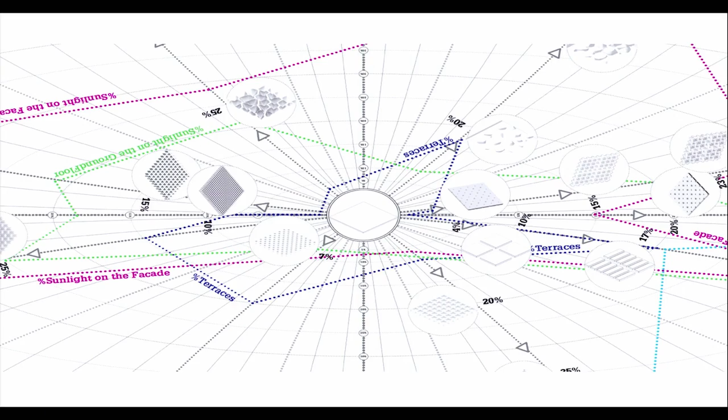And then you produce them together and make another exhibition out of it. Show them and show the beauty of this kind of patios, better than any musharabia that we could imagine, or these kissing slabs, these bubbled clouds, or these towers that hug, or the splinter towers in the almost ephemeral ending with this New Babylon version.

So what's next afterwards? One thing: students. I need for every model 3 students, 3 weeks of work. You cannot do that anymore, they told me.

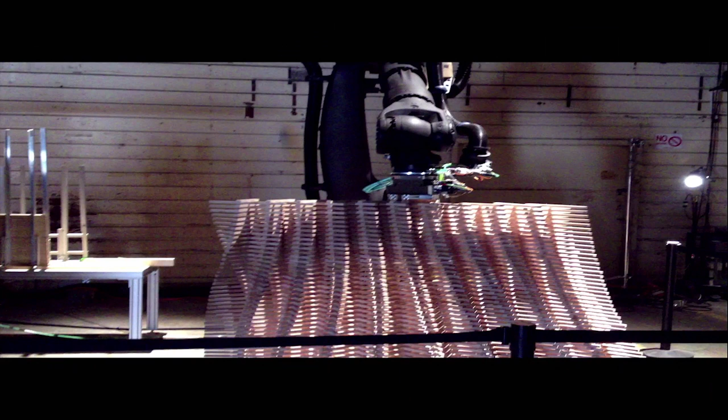So this is the robot that we got from the Gravity filmmakers in Los Angeles, and that we program at the moment so that the Lego can be adapted to that. So this is the student work, basically, with Grasshopper and Rhino in a combination, making that scripting considerable. So that is the knowledge, ultimately.

And this is symbolic, of course, of the discussion of last weeks, where everybody is talking, if robotization goes on, how many jobs do we lose in this way? I am quite optimistic in that way. I want to research that next.

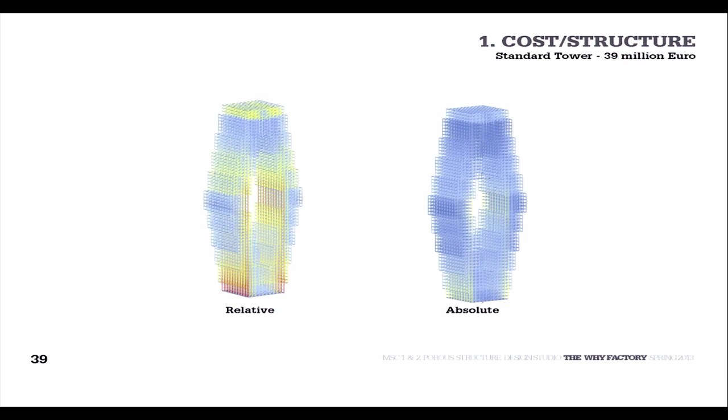But what's next? Currently, we have finished the book with also calculating how much it costs. So we do that on the base of this kind of steel structure, where we measure the deformation and say the amount of steel to compensate that, and visualize that in 2 ways. And we measure with any opening act how much steel that costs. I will give you the results later to make it more practical.

Yeah, what is next after this? How to really conclude the issue when I brought you through this story. Where is my conclusion? There it is.

So, final part before we go to the bar. And this is Barbapapa. And Barbapapa is maybe my favorite project at the moment, to end up with that. And don't worry, I will also make Barbamama, but that comes afterward.

It is based on different institutes that work. So here you see the molecules, the CHO connections by Akzo Nobel, which make a connection that can change by electricity. That's funny, because if you have millions of them, then I could suddenly make a kind of rubber that becomes stiff, or not stiff again. I can make basins at that moment, or I can make water coming out. I can make furniture everywhere, where of course the neighbor has a bump in that way, or I can make windows anyway. So this was the initial dream, and what came afterwards?

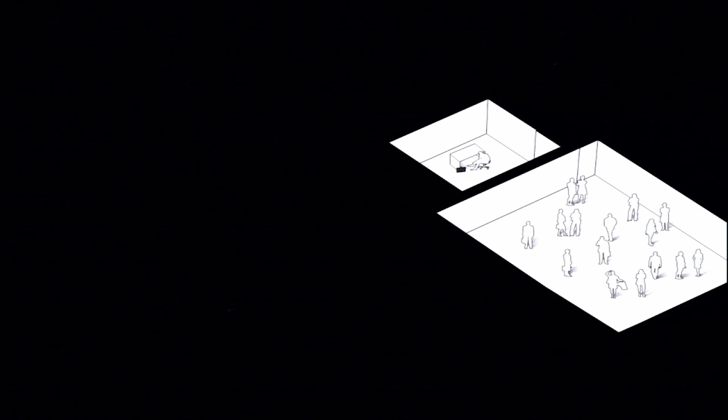We initially started to investigate: what do we actually need in our homes? In that way, we sleep, then we rise, and the bedroom can shrink. We have a shower, have breakfast, and go out, and the house can go away. We can continue this calculation with offices or other domains. How much space do we really need per second? That's what this research was excavating, and it will be shown soon in this book and exhibition.

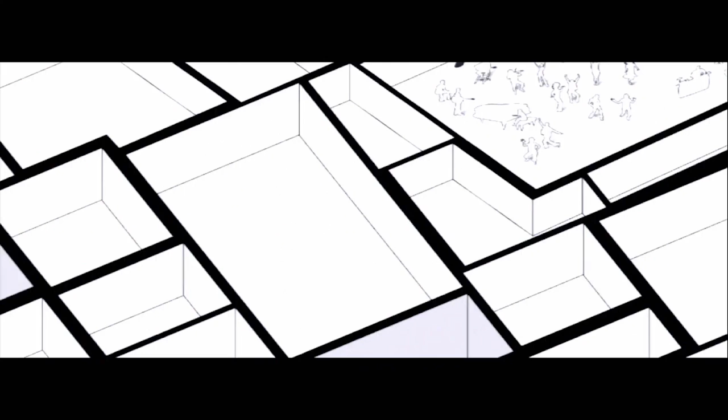So this is the whole 24-hour cycle. But it becomes interesting when we consider our neighbors again. What are they doing in that same moment? And how can we optimize for that? That's what this kind of study is doing.

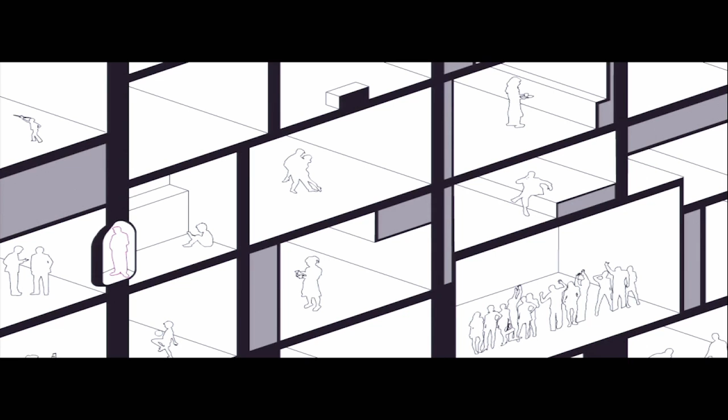This is not a proposal, don't worry. I look at one moment in this film, which I love a lot. Did you see it? You know, when you throw your kid in the bubble bath of IKEA and the other kids don't feel it, because the balls dampen the movement. So they don't cry at all in that moment. That is possible with this material.

You just go a little bit away and your neighbor can pass by. This is, again, a very polite way of going further with this substance.

So what was next after this calculation? We made a film where every student had 10 seconds to make a question, the questionnaires film. It's based on Leni Riefenstahl.

It's about beauty, so there's a man in this case, and the man sleeps. How much space do I need? I need a little bit like this, but that's actually odd. I have a nightmare, maybe I do something like that. And then the man wakes up, and he needs some kind of space to breathe, to look at it.

The nice thing is also that the material pushes you up in a way, like Charlie Chaplin's Modern Times, so that you can start to walk. Then this fragment asks, how much space do I need in front of me, and when do I need that? With this kind of acceleration, the space needs to be measured as such, and the echo, or memory of the space, needs to be addressed in that way.

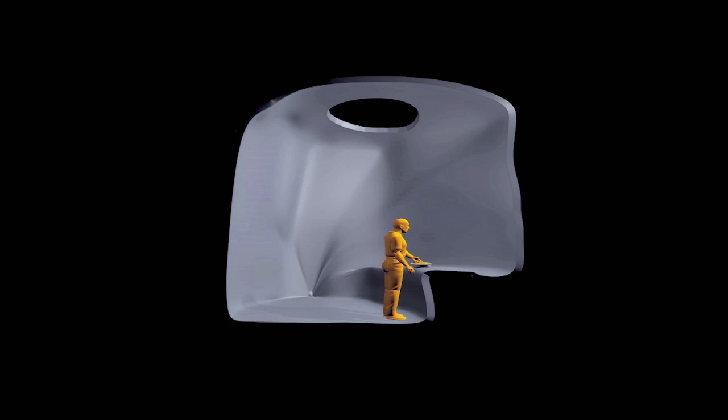So then we go further. We need breakfast, of course, and he's going to sit. So the issue is that any ingredient drops from the ceiling and somehow pieces warm up - that material question is something we architects have to ask AkzoNobel in order to make them work. And that's what we can do. And then this kitchen you have to build, of course, that's clearly a good kitchen where things are boiled and you have a view and you consume it. And that's still part of the game.

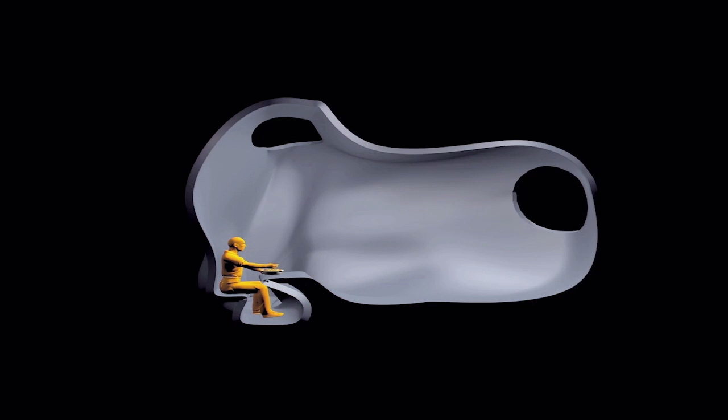And then of course, the trash bin sucks away everything that we don't need in the end. Okay, there it goes, and washes it in the meantime. Relax is what it says. And this is continuous - calculating every element is what these students seem to ask in this.

So this is a project of 4 months in that way. I will stop here because now the love affair begins, and I don't. So what do you do next? The Felt Room, together with Pastoe, is like an example of how to work with that material. So please give me 5 seconds for finishing this, and you see how that comes out - how this test with felt can be done.

Then we of course have to make analysis of how to measure everything in that way. So you see the first element, how Muybridge measures all the movements, fades out, and we can do the mirror effect in order to understand how much I need to prolong it. So from one step to the other, from measuring the back to the front, is what this is going to do. We try to make the smallest piece, and you see here the magic carpet.

This morning a discussion with Vitra to make that possible now. So here 2 students basically work on that, and in the end they will be rich, because this is what their dream is about. You have your thing, and your carpet turned into a bench, into a couch, into a chair, anything you would like to have - on the spot, just 2 by 2 meters.

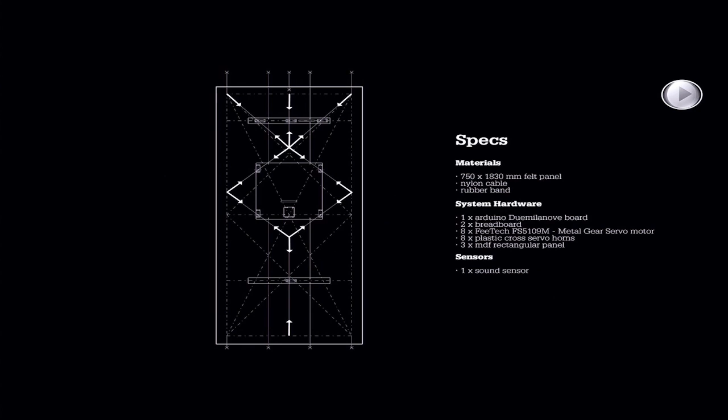So there are many ways of getting these things to move. Sound is one of the elements. So this is one of the specs of the installation. This is like a detail of that. So it's very stupid technology for this moment. So here you see the wallpapers.

Hello. And the wall reacts - so it works. This is what I say.

So what's next? I hope to show you today, because like a sequential thought - sequences are not bad. A lot of people talk in terms of clouds, but on the other hand, we have to build in that way a rhetoric. So with every maximization, it reveals a next step. And with that observation, this sinusoid of research, I hope to give you a contribution to your beautiful building and your beautiful celebration. Thank you very much for your attention.